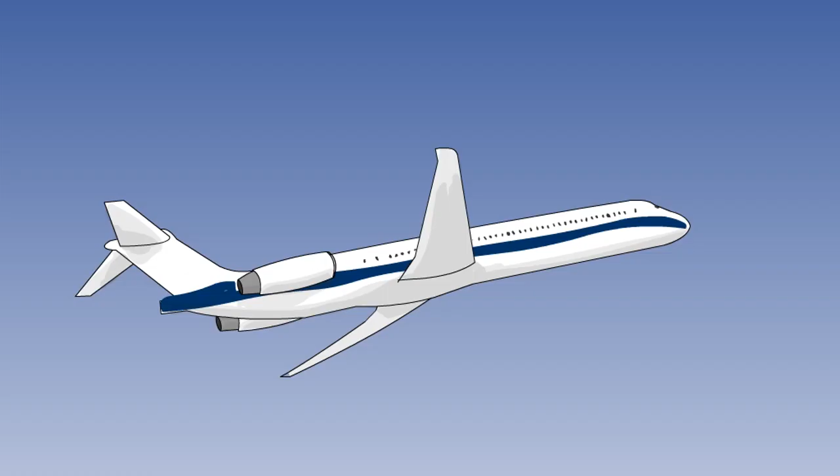Traditionally, such operations were considered unacceptable for twin-engined aircraft. For this reason, before 1985, long-range oceanic flights had to be carried out by 3 or 4 engine aircraft. Under EASA rules, unless specially authorized by the controlling authority, a Performance Class A public transport twin-engined aircraft shall not fly a route that takes it more than 60 minutes flight time at its one engine out speed from an alternate. This is laid down in EU-OPS, which was formerly known as JAROPS.

Clearly, this imposes operational limitations. Here is the direct route from London to New York. This can be flown by 3 or 4 engine aircraft.

However, consider a twin-engined aircraft. Let's put in some alternate airports. And now we'll draw in some circles representing 1 hour's flight at the one engine out true airspeed. You can see that this route leaves a gap between Shannon and Gander. A twin-engined aircraft not covered by ETOPS regulations would therefore have to fly this longer route in order to stay within the 1 hour range circles. This adds to cost and the time.

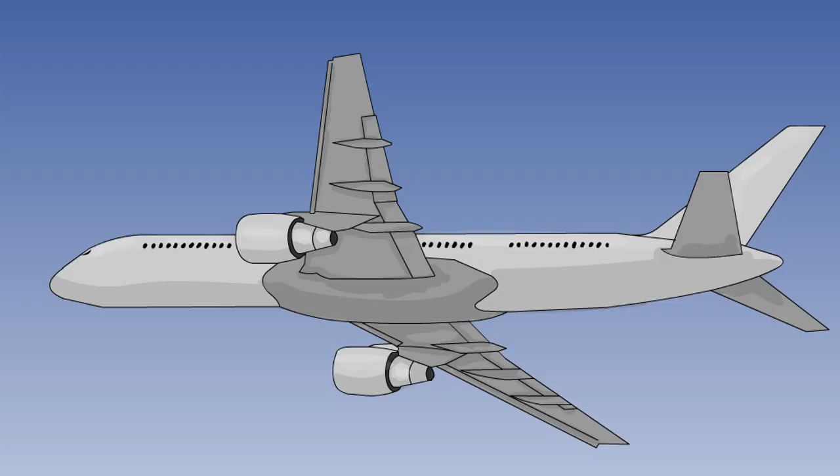This situation changed from the early 1980s onwards, when more powerful and reliable engines were developed. It became possible to build twin-engined aircraft capable of carrying large numbers of passengers over thousands of miles. Manufacturers and operators lobbied that the chances of an engine failing in flight were now extremely low, and also that in the unlikely event of an engine failure, a twin-engined aircraft could still safely operate on one engine for longer periods than 1 hour. This argument was accepted, and the regulations were changed, allowing the first ETOPS flight to take place in 1985.

However, the regulation and control of such flights is extremely stringent. Each operator requires an individual ETOPS approval from its National Aviation Authority, and only certain approved aircraft types can be authorized.

Let's look at some of the definitions used in ETOPS. Firstly, ETOPS itself. The letters stand for Extended Range Twin-Engine Operations. It is defined as those operations intended to be, or actually conducted by twin-engined aircraft over a route that contains a point further than 1 hour's flying time in still air at the normal one engine inoperative speed from an adequate aerodrome. We shall look at the definition of an adequate aerodrome shortly.

We therefore need to define the normal one engine inoperative speed. The operator is required to determine a speed for the calculation of the maximum distance to an adequate aerodrome for each two-engine type. This is not necessarily the exact speed which would occur on the occasion of any particular emergency, since that would vary with weight, temperature and altitude. However, it is the speed to be used for all planning and should cover the typical worst case.

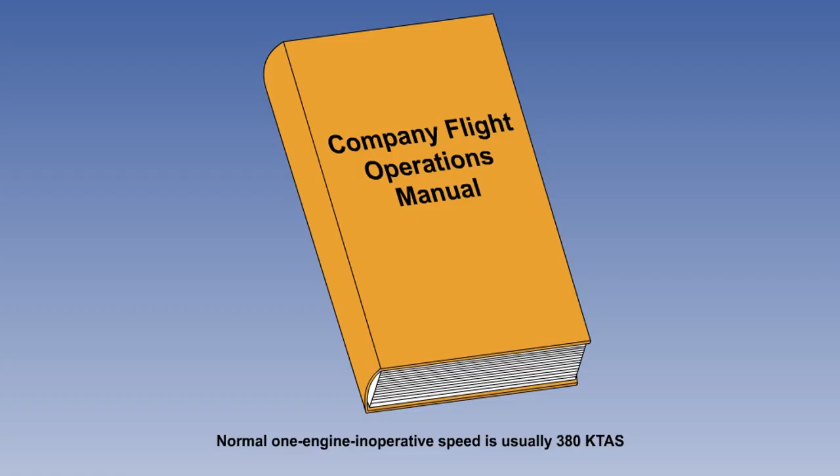The threshold time is the maximum time that a twin-engined aircraft is permitted to fly on one engine on any route unless it is governed by ETOPS regulations. It is 60 minutes. Alternatively, it may be defined for some operators as a threshold distance, in which case it is the distance travelled in still air in 60 minutes at the normal one-engine inoperative cruise speed.

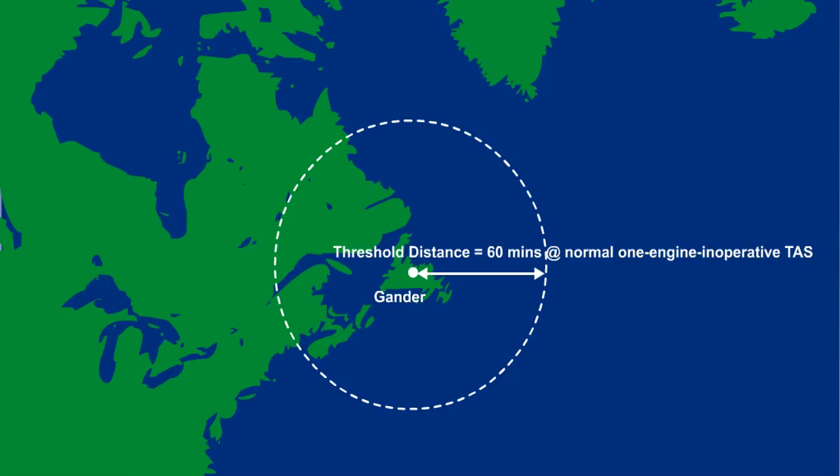However, where an ETOPS extension is granted, the rule time is used. This is defined as the maximum time at the normal one-engine inoperative speed that any point on the route may be from a suitable aerodrome for landing. Again, we will look at the definition of a suitable aerodrome shortly. Alternatively, this may be quoted as a rule distance, in which case it's the distance travelled at the normal one-engine inoperative speed in the rule time.

The ETOPS entry point is that point along the track where the aircraft first passes the threshold distance from any adequate aerodrome. The ETOPS exit point is that point along the track where the aircraft is last more than the threshold distance from any adequate aerodrome.

The ETOPS segment is that portion of the route where the aircraft is more than the threshold distance from any adequate aerodrome. This may alternatively be known as the ETOPS sector. ETOPS regulations are applicable only over the ETOPS segment.

We now come to the definitions of an adequate aerodrome and a suitable aerodrome. Firstly, an adequate aerodrome. For every proposed ETOPS route, the operator must compile a list of alternate aerodromes to be used. These must be approved by the operator's National Aviation Authority and listed in the Company Flight Operations Manual.

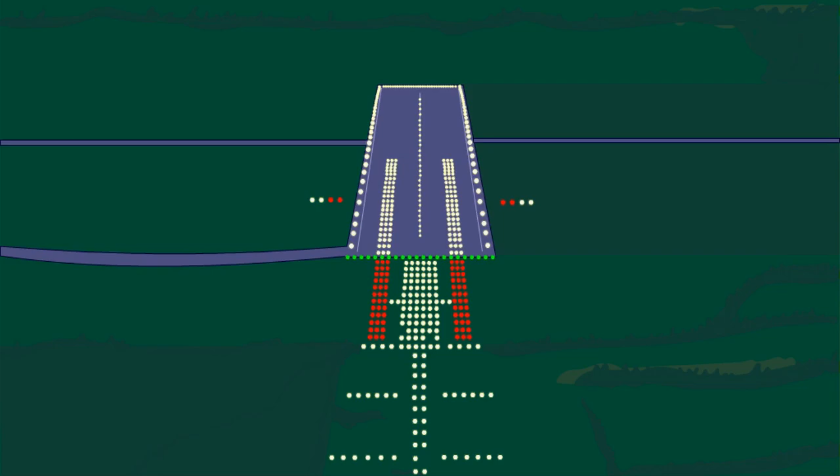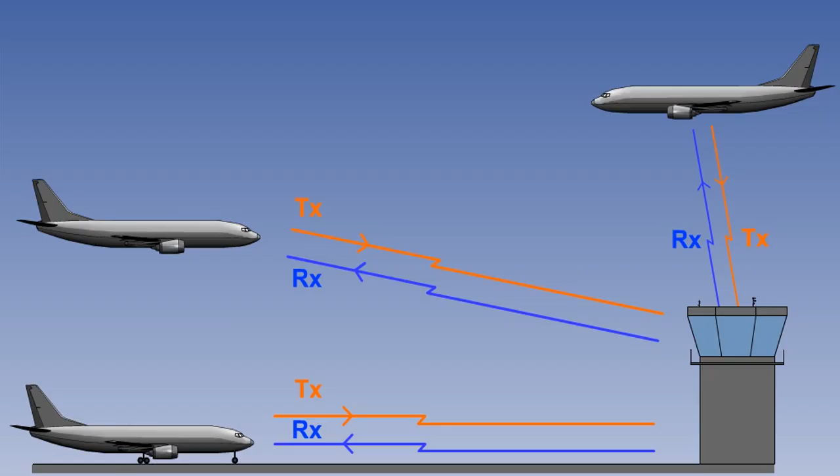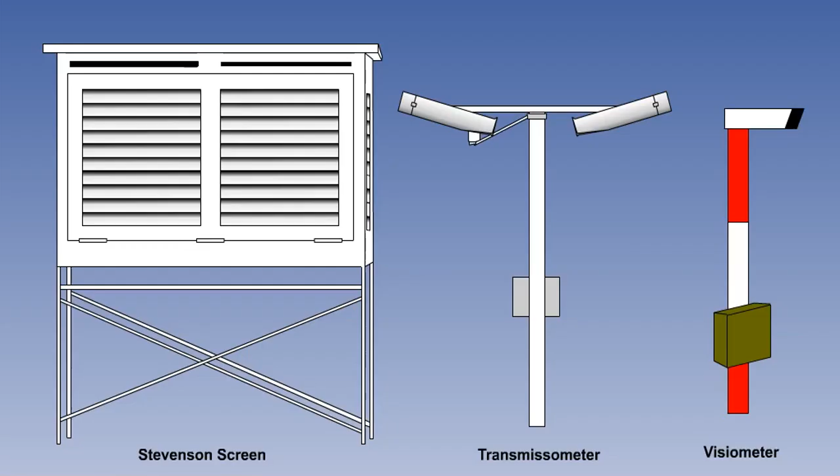The runways must be long enough for the operator's aircraft types and must have a suitable surface and load-bearing capacity. The runway lighting must meet approved standards. There must be adequate air traffic control facilities. Communications equipment must meet certain standards. There must be navigation aids and an instrument approach and letdown aid, ILS or ground radar. There must be appropriate weather reporting facilities. And fire and emergency services must meet requirements for the number of passengers to be carried.

Neither the company nor the aircraft commander of any flight has the authority to use any other alternate aerodrome on this route without approval from the National Aviation Authority, followed by an amendment to the Company Flight Operations Manual.

So, what is the difference between an adequate aerodrome and a suitable one? For any particular flight, the aircraft commander selects from this list of adequate aerodromes the ones that he will nominate as his alternates.

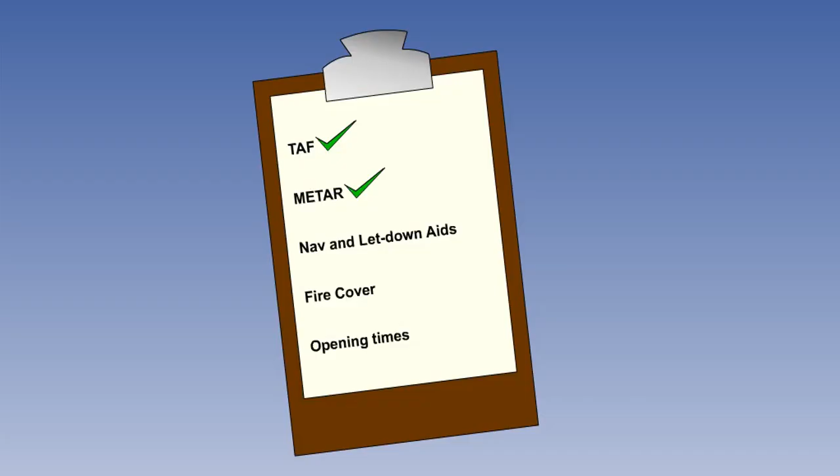Their weather must be forecast to be within limits at the time. The navigation and letdown aids must be serviceable. The fire cover must be in place. And each aerodrome must be open from 1 hour before it might first be needed until 1 hour after it might last be needed.

These become the suitable aerodromes for that flight and are nominated on the ATC flight plan.

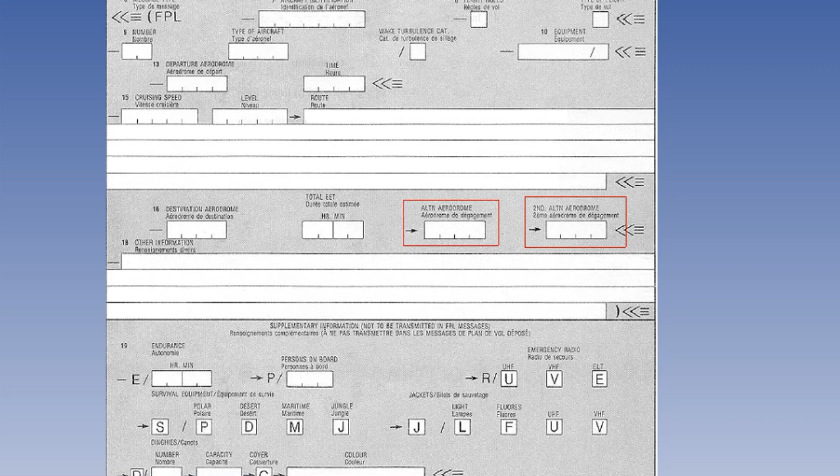We said earlier that ETOPS flights are subject to more stringent regulation and control than normal non-ETOPS operations. It is a requirement to compile a minimum equipment list for any public transport operation. However, for ETOPS operations, the existing MEL must be re-evaluated and adjusted as necessary to reflect the higher safety standards required for prolonged operation on one engine.

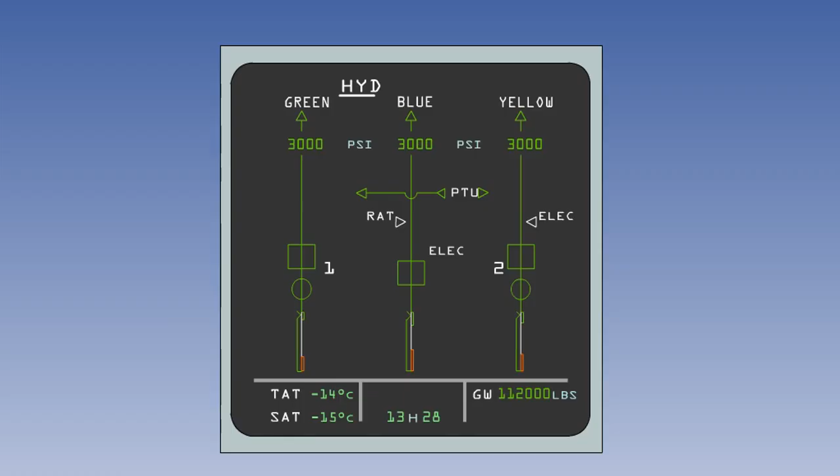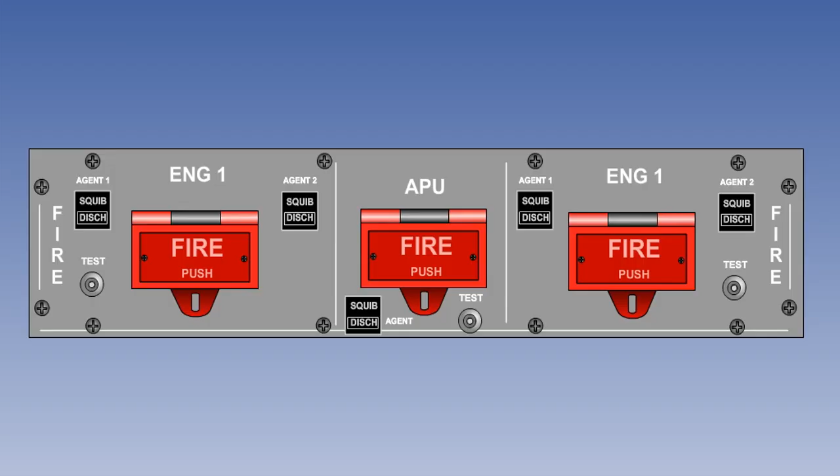These will include reappraisal of such systems as hydraulics, electrics, instrumentation, fire suppression, air conditioning and pressurization, and many others.

Critical point is always an important consideration in any flight which takes place a long distance from alternates, whether ETOPS or not. The easiest method of calculating it, and certainly the one you should use for exam questions, is the equation that x equals dh over O plus h. However, there are many other ways of establishing it.

One of them is by use of the Jeppesen North Atlantic Plotting Chart, Chart NAP in the Jeppesen Manual. The chart has a number of circles centered on various airfields. The dotted lines represent a rule time of 180 minutes flight time, and the solid lines represent a rule time of 120 minutes and a distance of 820 nautical miles. A TAS of 410 knots has been assumed.

In the centre of the chart is a line with an arrow at each end. The left arrow points to Charlie Yankee Quebec X-ray, which is Gander, and the right one to Echo India November November, which is Shannon. The orientation of the arrow is the great circle track between Shannon and Gander, and the figure 1715 is the total distance between them. The vertical line through the figure shows the halfway point.

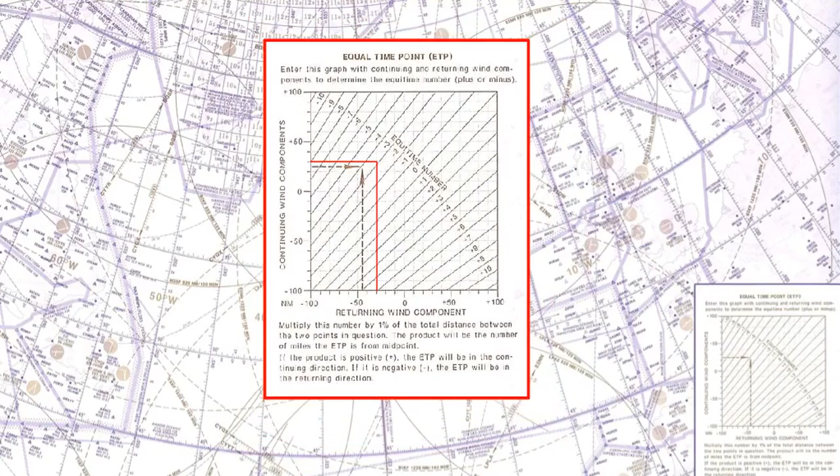As the total distance between Shannon and Gander is 1715 nautical miles, 1% is 17.15. Multiplying by -3 gives a distance of -51.45.

As the answer is negative, we move the equal time point 51.5 nautical miles in the returning direction, this is towards Shannon. The distance markers on the arrow between Shannon and Gander help us plot the position. This is a quick and simple way of adjusting the equidistant point for wind component to make it the equal time point, or critical point.

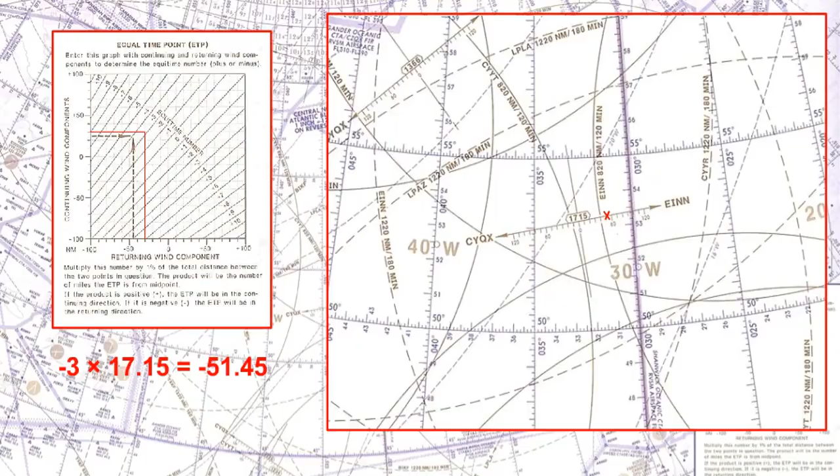The Jeppesen graphical method of establishing critical point requires the graph to be included on the published chart. Additionally, it is valid for only one TAS, which may not be the one that our aircraft uses. A method that can be used on any navigational chart and for any TAS utilizes direct plotting of the wind vector.

We start by plotting the still air critical line, which is the halfway mark. We now work out the time taken in still air to fly to either aerodrome at the one engine out speed. The distance from Shannon to Gander is 1715 nautical miles, so the distance from the halfway point to either of them is 857.5 miles. At the typical one engine out TAS of 380 knots, this would take 2 hours and 15 minutes.

We now apply the wind vector. As an example, we shall assume that the forecast wind velocity is 315 at 50 knots for the whole of the route. However, this is just 1 hour's worth of wind. From the critical point, the aircraft would be in this wind for 2¼ hours.

We therefore need to expand our wind vector by this factor. 50 knots for 2¼ hours gives a vector length of 112.5 nautical miles. We plot this upwind from the still air critical line, that is, the equal distance line. This gives us the wind-adjusted equal time line.

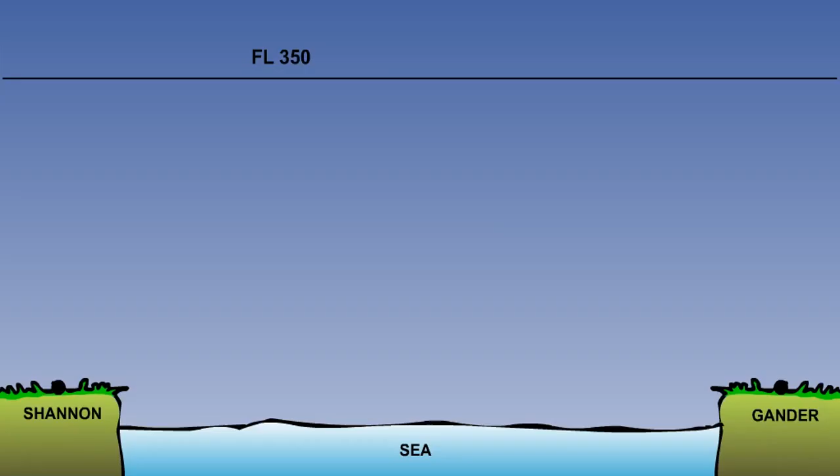Fuel policy also needs to be closely addressed for ETOPS operations. Imagine an aircraft on an ETOPS segment between Shannon and Gander. The aircraft has arrived at the critical point and the flight is proceeding normally with no emergency. How much fuel is required to complete the flight?

Firstly, we need the trip fuel for the remaining part of the flight. We also require the remaining contingency fuel, usually 5% of the remaining trip fuel. Alternate fuel is required, and we also need final reserve fuel. Let's assume, as an example, this amount comes to a total of 6,800 kilograms.

Now imagine the aircraft back at the critical point, but this time we have an engine failure. The aircraft will drift down to its stabilizing altitude. The actual altitude on the day will depend on weight and temperature, but for most modern airliners it will be in the medium to high 20,000s of feet. We will assume it is flight level 250.

The lower altitude and slower true airspeed will result in a longer flight to the alternate and an increase in the fuel required. If the aircraft had proceeded back from the critical point, it would have taken the same time and used a very similar amount of fuel.

However, a pressurization failure could be a worse case. It would be essential to initiate an immediate descent to flight level 100. This would reduce the speed and increase the fuel consumption still more. This would be followed by a letdown and an instrument approach to the airfield. Again, if the aircraft had proceeded back instead of onwards from the critical point, it would have taken the same time and used a very similar amount of fuel.

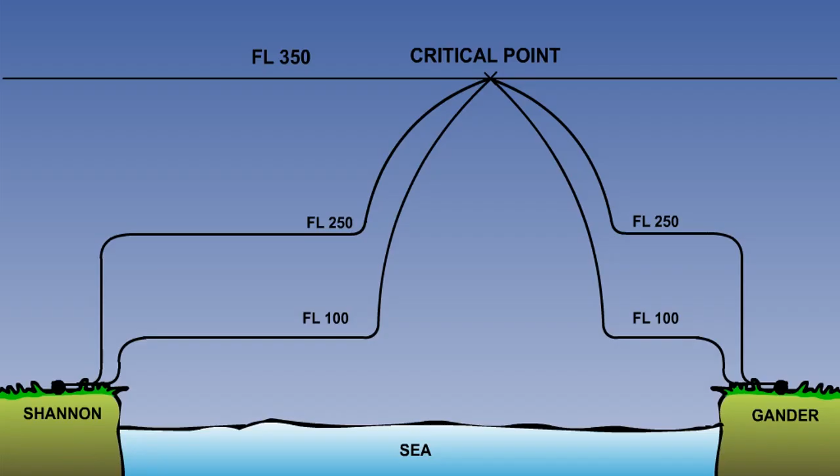The rules for the required fuel following an engine failure are not quite the same as the normal case. We need the remaining trip fuel, but this time for the descent, the transit at flight level 100, and the second descent to 1500 feet, plus the normal 5% contingency fuel.

We don't need alternate fuel. We are already diverting. The remaining trip fuel and contingency fuel has become the alternate fuel. We still need final reserve fuel, but it is assumed that if you've just flown halfway across the Atlantic on one engine, you'll get a certain amount of priority when you arrive. Final reserve fuel is therefore reduced to 15 minutes instead of the usual half hour.

In addition, we are required to have fuel for an instrument approach, which may not be successful, so we'll also need fuel for a missed approach procedure, another instrument approach, and a landing.

Will this amount of fuel come to more than the amount we would have needed if the flight had proceeded uneventfully? That was 6,800 kilograms. The answer is that it depends on the circumstances.

There are many variables. If the aircraft had been proceeding to Los Angeles after passing Gander, there would have been plenty of remaining normal trip fuel. However, if it had been going to Gander or Montreal, there would not. The number of engines available will also make a difference. One engine is usually more economical than two, but if both are working normally following a pressurization failure, you would not plan to shut one down in order to save fuel.

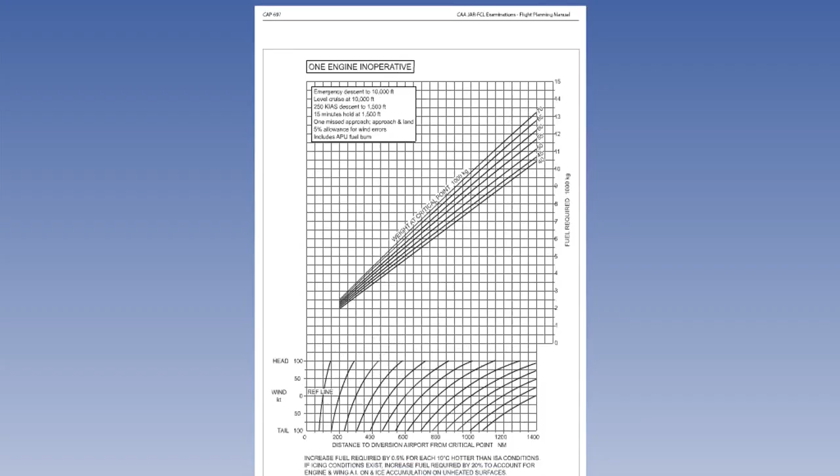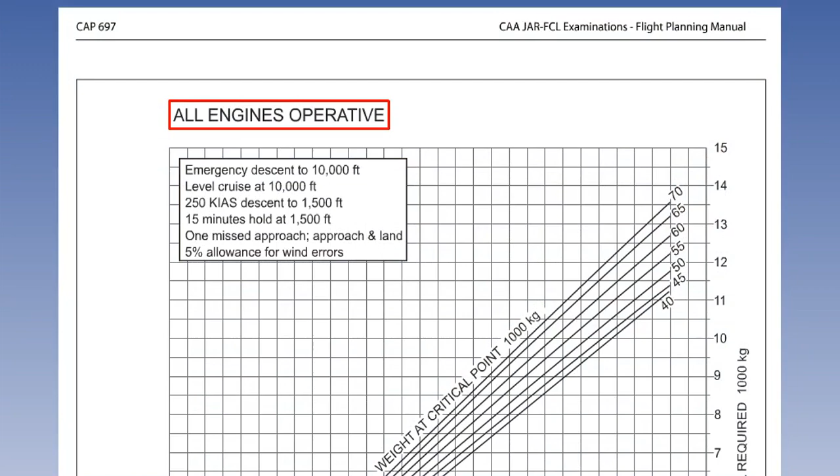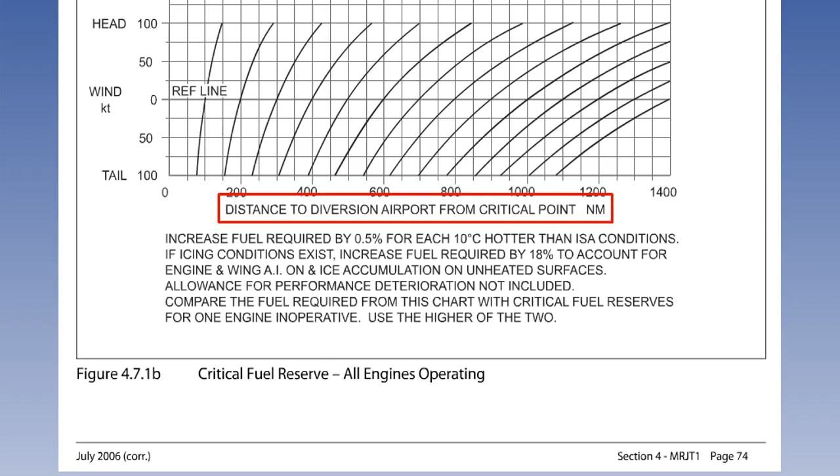CAP 697 gives us the data to calculate critical fuel for the Boeing 737-400. The relevant graphs are figure 4.7.1 Alpha on page 73, for the one-engine case, and figure 4.7.1 Bravo on page 74, for two engines. These are used for pre-flight planning to establish critical fuel. Notice at the bottom it says distance to diversion airport from critical point. The calculation is from the critical point, not the actual point of diversion. This covers the worst case.

Let's see what they include. For the all engines operative case, the white box at the top left says emergency descent to 10,000 feet, level cruise at 10,000 feet, 250 knots indicated airspeed, descent to 1500 feet, 15 minutes hold at 1500 feet, one missed approach, approach and land, and a 5% allowance for wind errors.

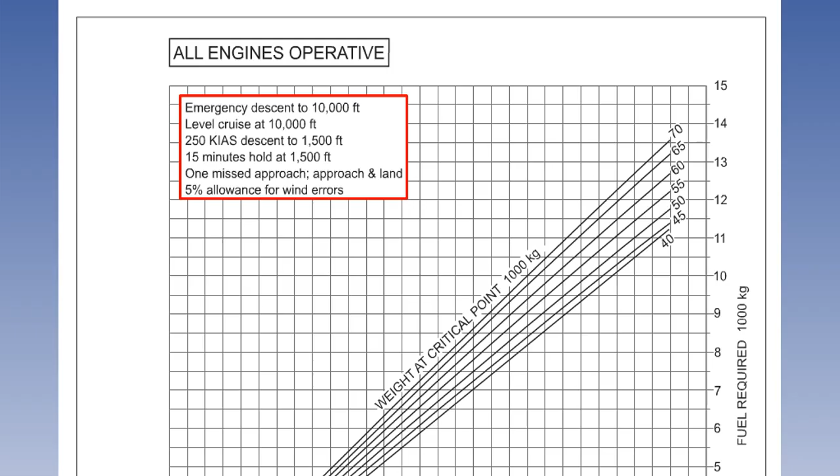For the one engine inoperative case, it is the same except for the last line where we have the words 'includes APU fuel burn.' This is because the engine which has failed may be the one which supplies essential services such as electrics or hydraulics. If so, we may need to have the auxiliary power unit on to keep these going.

So now let's see how they are used. We'll assume that the critical point is 600 nautical miles from the alternate to be used. There is 50 knots headwind, and the aircraft total weight at the critical point is 50,000 kilograms. Icing is forecast at 10,000 feet.

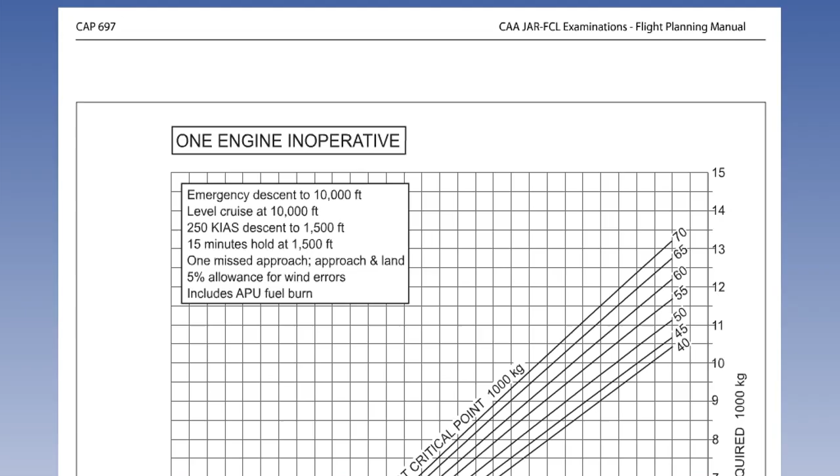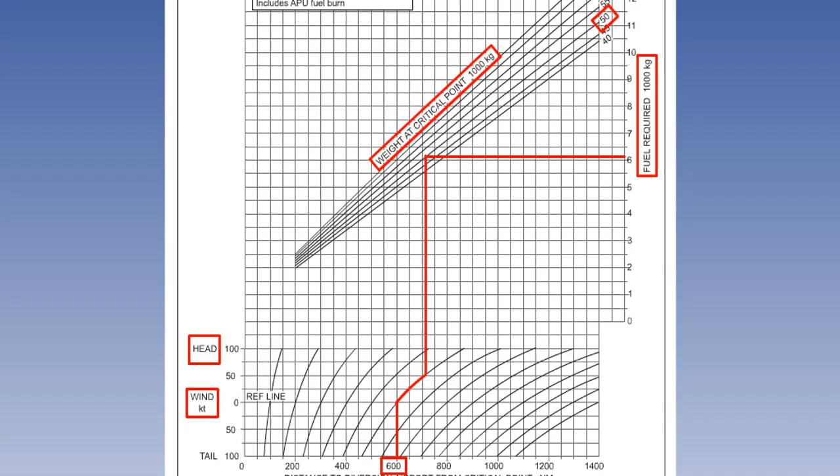Then we go vertically to the sloping line for the appropriate weight at the critical point, 50,000 kilograms in this example. Then travel horizontally to the right-hand edge and read off the fuel, which, in this case, is 6,100 kilograms.

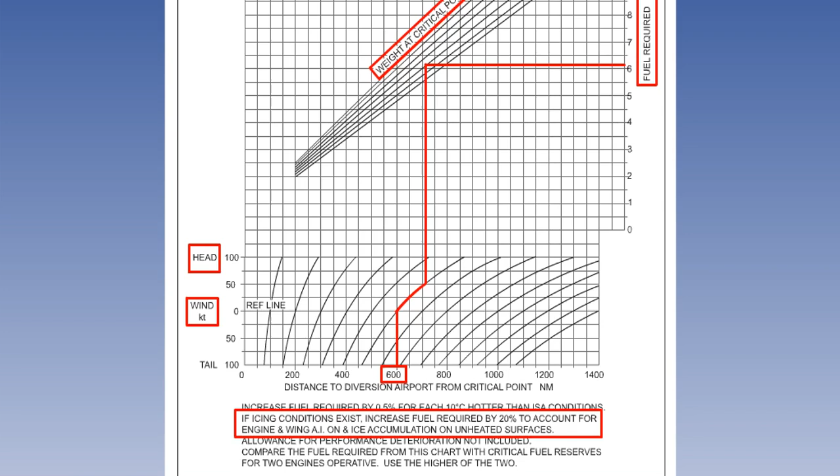But remember, icing was forecast. Read the second and third lines under the graph. If icing conditions exist, increase fuel required by 20% to account for engine and wing anti-icing on, and ice accumulation on unheated surfaces. 6,100 plus 20% comes to 7,320 kilograms.

However, we haven't finished yet. Read the last two lines under the graph. They say, compare the fuel required from this chart with critical fuel reserves for two engines operative. Use the higher of the two.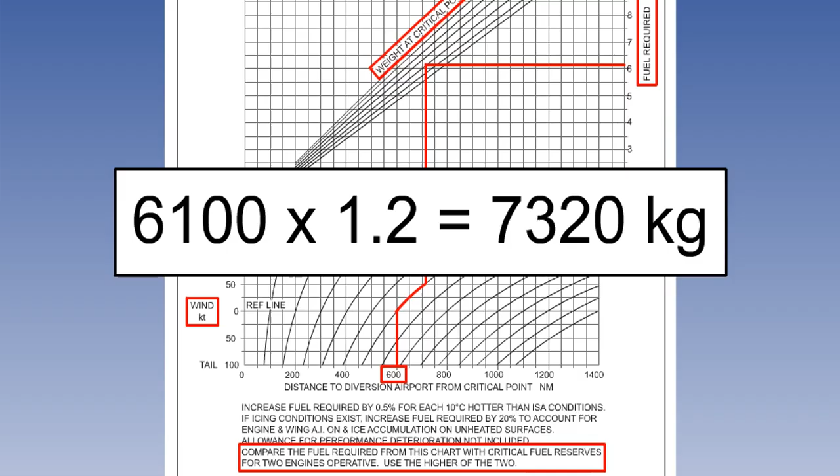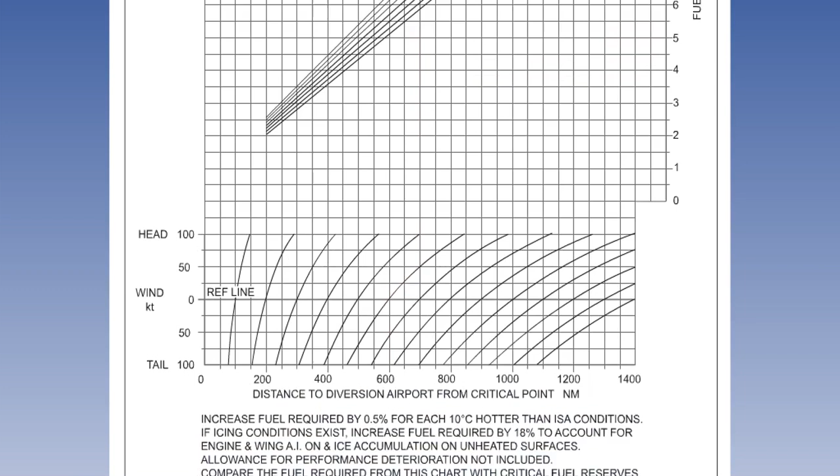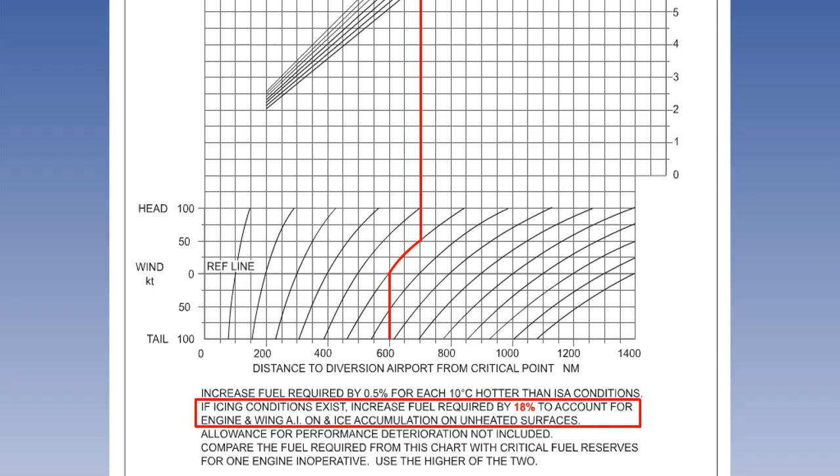So now we do it all again with the all engines operative graph. This time we get 6,300 kilograms before allowing for icing. But the icing correction figure is 18% for the two-engine case. 6,300 plus 18% comes to 7,434 kilograms.

So we take the worst case. Not surprisingly, two engines use more fuel than one, though perhaps it is surprising that they use so little more. Our critical fuel is 7,434 kilograms.

There is just one other feature to point out before leaving the use of this graph. The fuel burn is for ISA conditions. For every 10 degrees hotter than ISA, we add 0.5% to the fuel. That's not 5%, it's 0.5%. So, for instance, if the graph figure was 6,000 kilograms and the temperature were 20 degrees above ISA, we'd add 1%. This would give a final figure of 6,060.

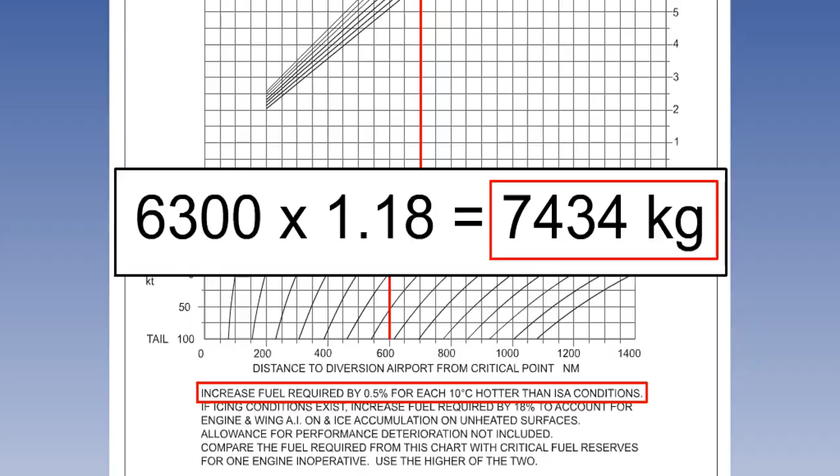We also need to be able to use the area of operation table at figure 4.7.2 on page 75 of CAP 697. The ETOPS area of operation is defined as the area within which the operator is authorized to conduct extended range operations. This area will be specific to each route.

For instance, the distance from Shannon to Gander is 1,715 nautical miles. Therefore, the area of operations will be half that figure, 858 miles. The maximum distance to any diversion within the rule time can be found from figure 4.7.2. This is based on ISA conditions in still air, one engine inoperative, and a drift down to stabilizing altitude starting at or near the optimum altitude.

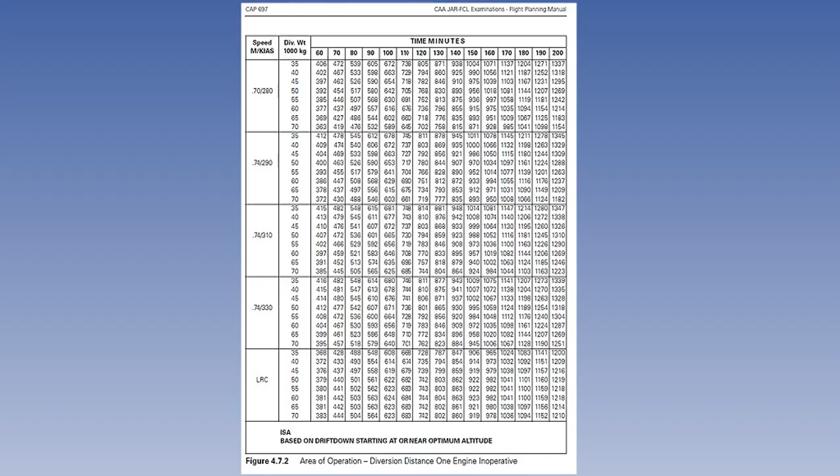The left column groups the table into the speeds to be flown for the drift down. For the first, for instance, the aircraft is held at Mach 0.7 until the indicated airspeed reaches 280 knots. The bottom one is for operation with the flight management computer, which has a facility to calculate long-range cruise drift down on one engine.

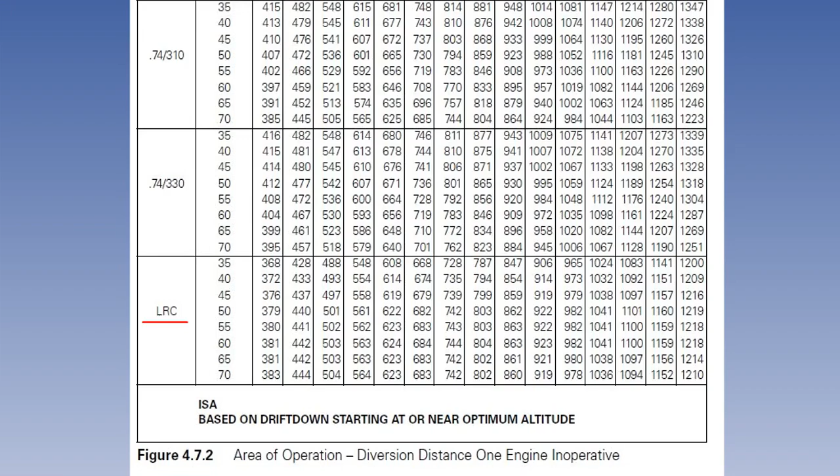We enter via the left-hand two columns with the drift down parameters and the weight at the start of the diversion. We will use Mach 0.7 and 280 knots and a start weight of 50,000 kilograms. If the rule time is 120 minutes, the maximum diversion distance is 768 nautical miles.

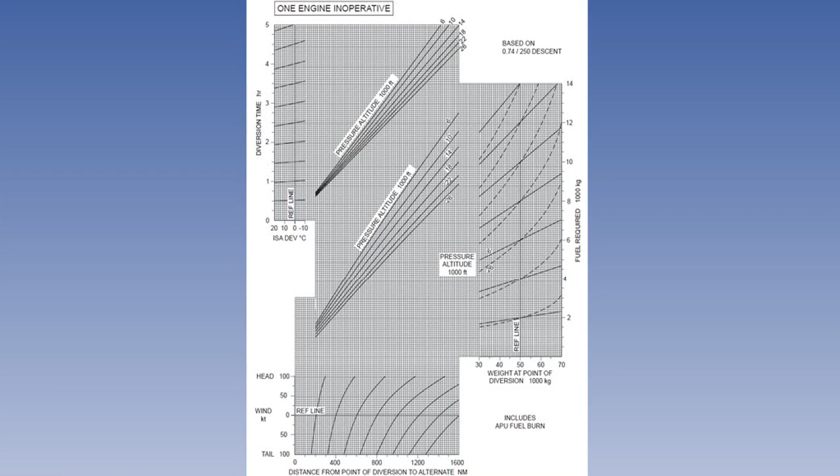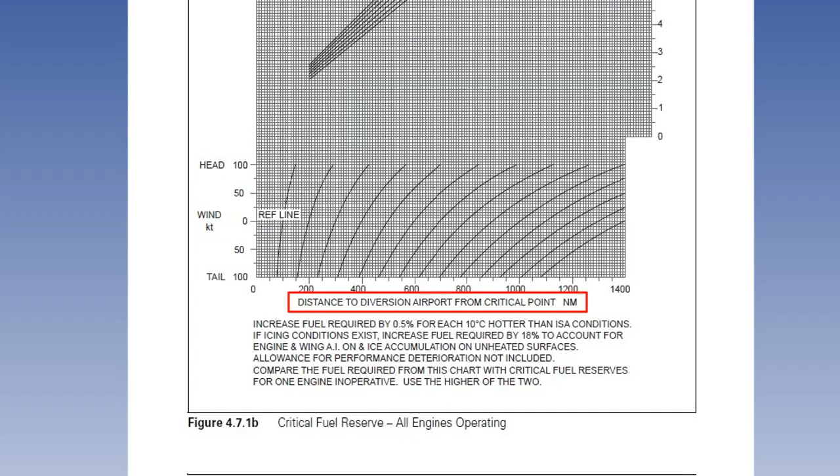Finally, we come to the in-flight diversion graph. This is different from the two we looked at earlier. You will remember that they were for planning purposes and were from the critical point to establish the critical fuel. However, that was for planning to cover the worst case. If a crew experiences an in-flight emergency, they are not going to proceed to the critical point. They will divert from wherever they are.

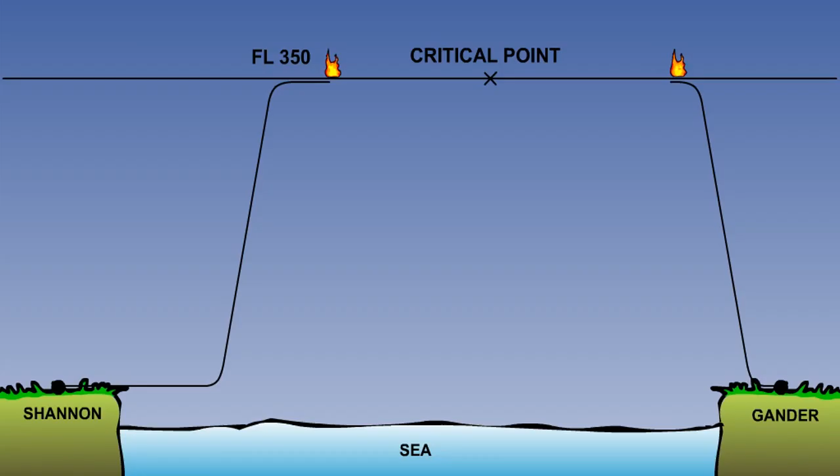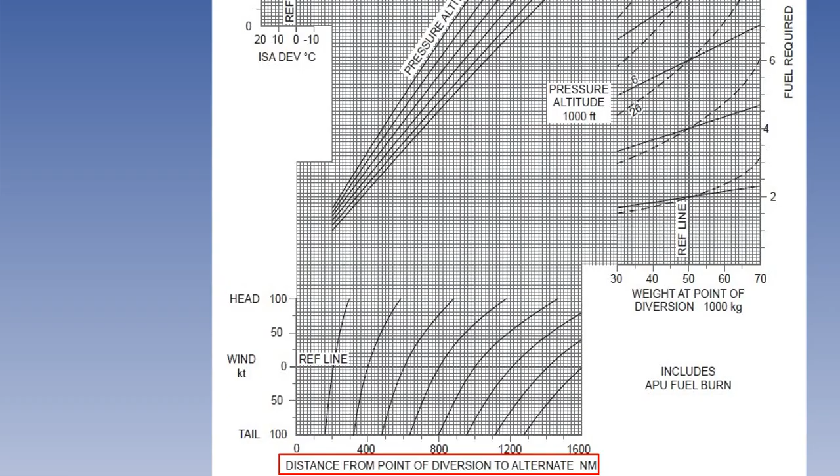Figure 4.7.3 on page 76 is for in-flight diversion. Note that the caption at the bottom says, distance from point of diversion to alternate. It works just like all the other simplified fuel planning graphs.

We will use the following figures as an example. Distance to diversion, 800 nautical miles. Weight at start of diversion, 45,000 kilograms. Stabilizing altitude, flight level 260. 50 knots tailwind. Temperature is ISA -10.

And if we follow the lines in the usual way, we get 3,700 kilograms and 2 hours flight time. Note that this is the actual fuel burn, including the APU burn. There is no contingency fuel or any of the other reserves that we had in the planning graph. You simply subtract the figure obtained from the graph from your current gauge reading to get the expected fuel on arrival at the destination.

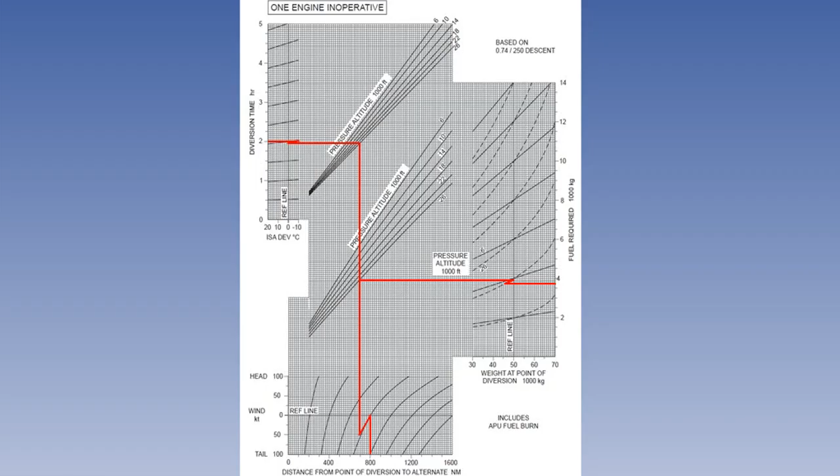Any airline which is sophisticated enough to operate ETOPS will use computer flight planning.

Here is a route. We've seen it before. It's from Muscat, which has the ICAO code Oscar Oscar Mike Sierra, to Male, which is Victor Romeo Mike Mike. Our en route alternate is Mumbai, or Victor Alpha Bravo Bravo.

There is an equal time point between Muscat and Mumbai, where the time back to Muscat is the same as the time to fly to Mumbai. And there is a second equal time point between Mumbai and Male, where the time to Mumbai is the same as the time on to Male.

This is what the computer flight plan looks like. Block 1 tells us that the time from takeoff to equal time point 1 is 1 hour 30. And from takeoff to equal time point 2 is 2 hours and 18 minutes. Block 2 gives us the calculated position of equal time point 1 and tells us that it is between Muscat and Mumbai.

If we go back to Muscat, our minimum off-route altitude or safety altitude will be 9,700 feet. If we divert to Mumbai, the safety altitude will be 7,700 feet. The track back to Muscat is 325 and on to Mumbai is 072. Do these look right?

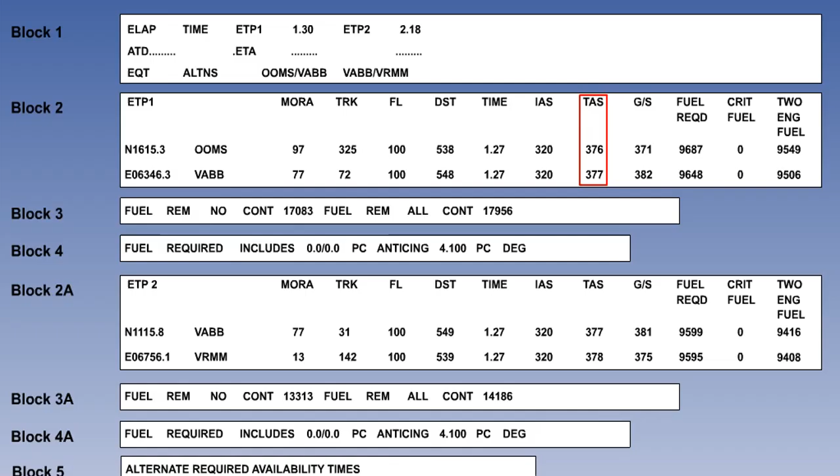You should have realized that the track to Mumbai is further south and therefore nearer to the equator. The temperature is likely to be hotter. For the same IAS, this will give a greater TAS.

The ground speeds are close but not identical. As before, you would expect that because of the effect of wind. And the one-engine fuel burns are slightly different, again because of the temperature difference.

The computer then compares these one-engine fuel burns with the normal route fuel, and in this case, no additional fuel is required. Strictly, this should be called additional fuel, and critical fuel should refer to the one-engine fuel burn, but the meaning is obvious here.

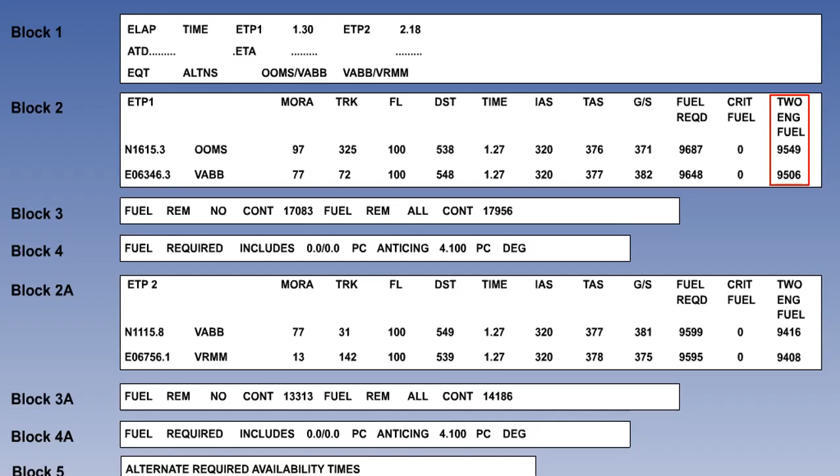And finally, in Block 2, we have our fuel burns for the two-engine case at flight level 100. For this aircraft, they are very slightly less than the single-engine case.

We now move to Block 3. This gives us the predicted fuel at equal time point 1. If we have no contingency fuel, it is 17,083 kilograms. However, if we have all the contingency fuel remaining, we will have 17,956.

Block 4 tells us that no allowance has been included for anti-icing. Again, no surprises there. We are close to the equator. However, there is a 4.1% factor included for the performance degradation of this particular aircraft. This figure will have been established from past flights.

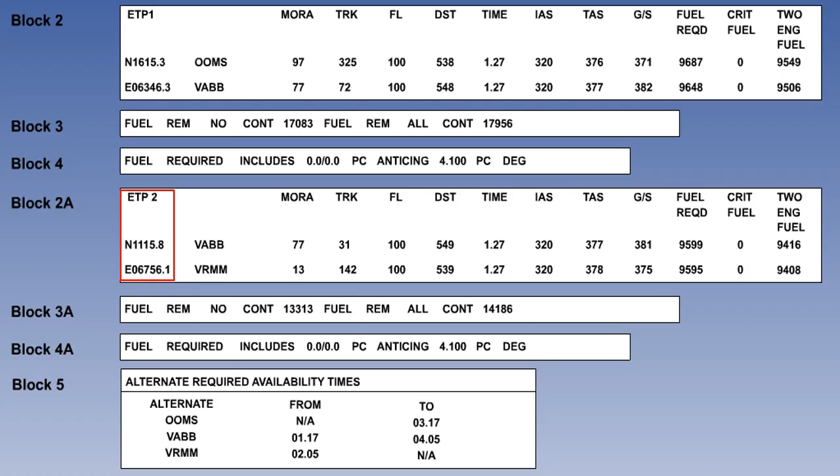Now let's look at Block 2A. This is the equivalent of Block 2, but for equal time point 2. Note that equal time point 1 was at about 16 north, but this is at 11 north. This is what you would expect from looking at the route. It's between Mumbai and Male.

Look at the safety altitudes for these two. Mumbai's is 7,700 as before, but why do you think Male's is so low? You should be able to work it out.

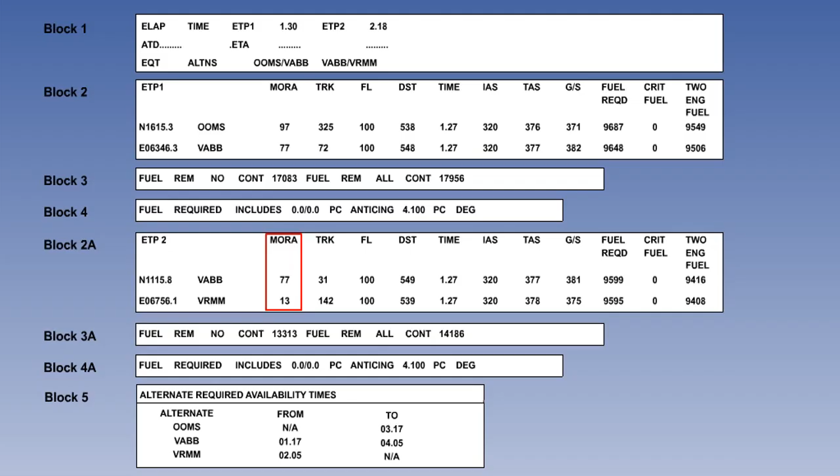The Maldive Islands are a group of coral atolls with an average elevation of 5 feet. The highest elevation on the islands is 8 feet. 300 feet has been added to cover unknown buildings, and then a 1,000-foot safety factor has been applied, giving 1,300 feet.

Let's check that the tracks look sensible. From equal time point 2 to Mumbai should be 031, and to Malé should be 142.

They look all right. The rest of Block 2A and Blocks 3A and 4A follow a similar pattern to Blocks 2, 3 and 4. This has been a demonstration of how to check a computer flight plan. Nobody expects you to recalculate all the figures, that's what the computer's for. But you should be able to understand the reasons for the data that you see, and you should be able to explain them to yourself and to pick up any apparent discrepancies.

You'll remember that we said at the start of this lesson, in discussing suitable aerodromes, that they have to be available from 1 hour before they might first be needed until 1 hour after they might last be needed. This also is covered in the computer flight plan in Block 5.

Let's start with equal time point 1. This is the last point at which we could possibly divert back to Muscat. We'll be able to work out that, if we did, we would arrive at Muscat at 2:17. However, equal time point 1 is also the first point at which we could possibly divert to Mumbai, and because it is an equal time point, we would arrive at either Muscat or Mumbai at the same time. That time must be 2:17. We can see this because we notice that Muscat must be open until at least 3:17, and that Mumbai must be open from 1:17.

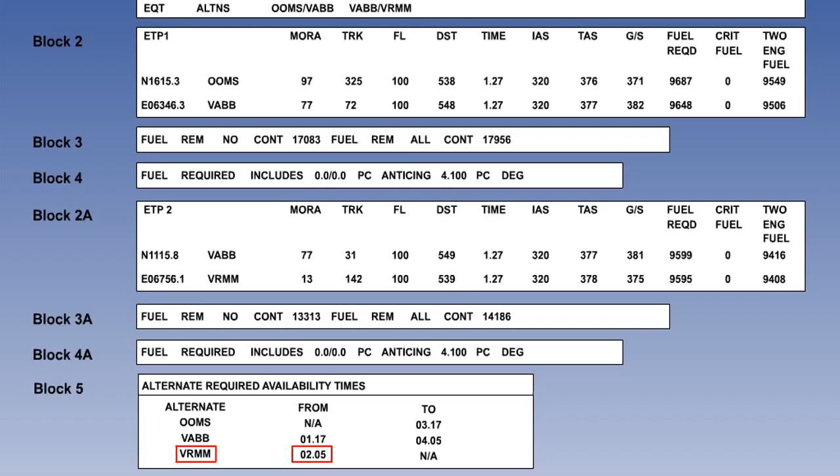Let's summarise this lesson. ETOPS is a regulatory framework to control the conduct of operations of twin-engined aircraft when their route takes them a long distance from the nearest diversion. Under EASA rules, unless specially authorised by the controlling authority, a Performance Class A public transport twin-engine aircraft shall not fly a route that takes it more than 60 minutes flight time at its one-engine out speed from an alternate.

ETOPS is defined as those operations intended to be, or actually, conducted by twin-engined aircraft over a route that contains a point further than 1 hour's flying time in still air at the normal one-engine inoperative speed from an adequate aerodrome.

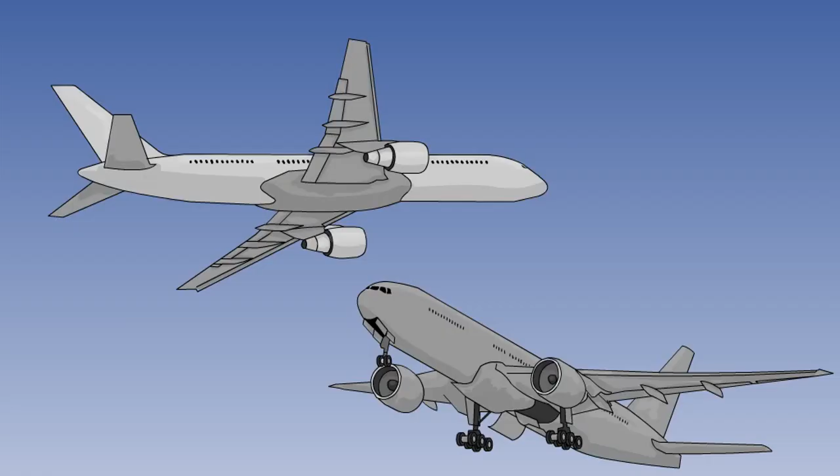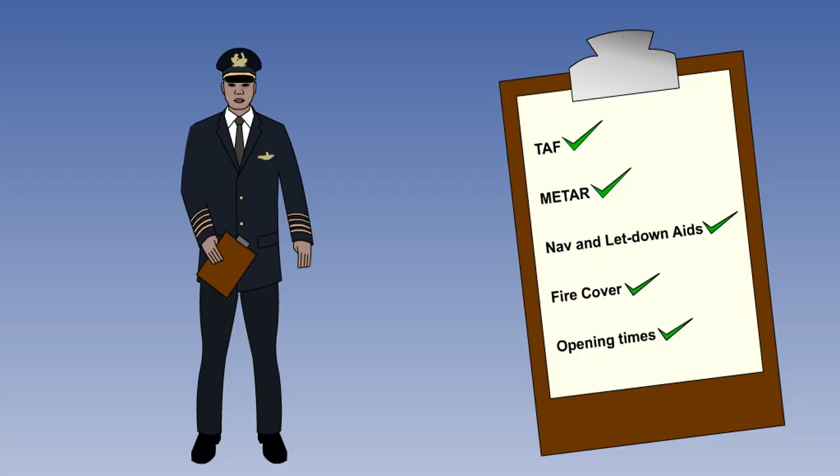The regulation and control of ETOPS flights is extremely stringent. Each operator requires individual ETOPS approval from its National Aviation Authority, and only certain approved aircraft types can be authorised. An adequate aerodrome is one selected by the operator and listed in the company flight operations manual, whereas a suitable aerodrome is one selected by the commander of the flight from the list of adequate aerodromes.

The minimum equipment list requirements are more stringent than normal operations, and the calculation of critical points becomes extremely important. Make sure that you are familiar with the use of the Jeppesen graph, although any ETOPS operator would in fact provide the pilots with computer-generated calculations, possibly including several alternates.

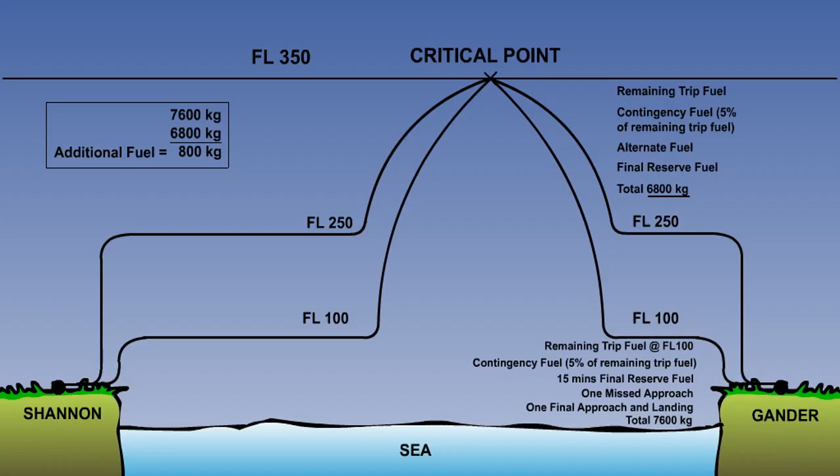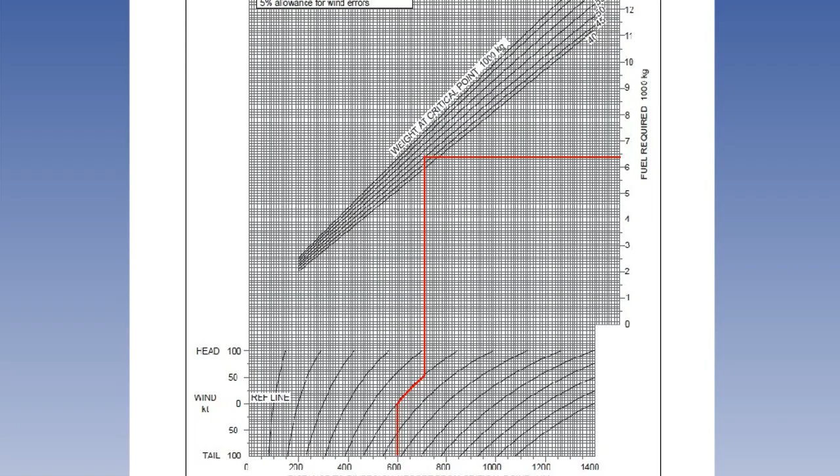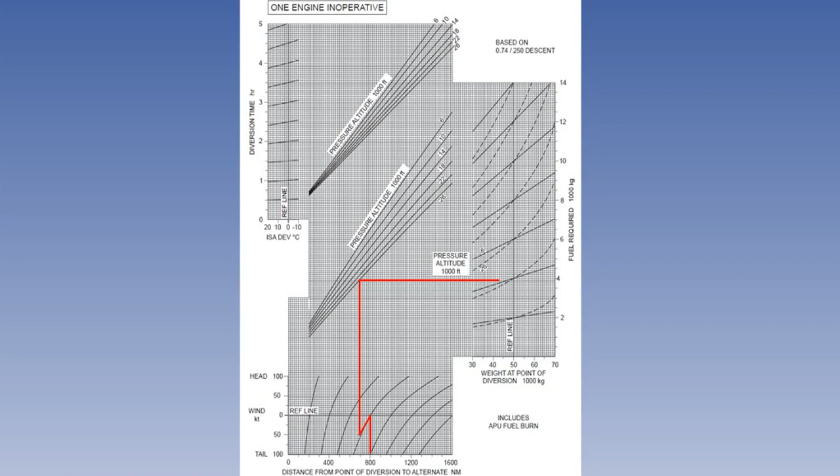It is necessary to establish what the critical fuel is and whether an uplift of additional fuel is required. You need to be familiar with the use of the critical fuel graphs on pages 73 and 74 of CAP 697, and the area of operations table on page 75, and the in-flight diversion graph on page 76. These are all examined.

We finished by looking at an ETOPS computer flight plan to bring these ideas together and to show you how to give the flight plan a quick common sense check. And we emphasised that any suitable aerodrome must be available from 1 hour before it might be first needed until 1 hour after it might last be needed.